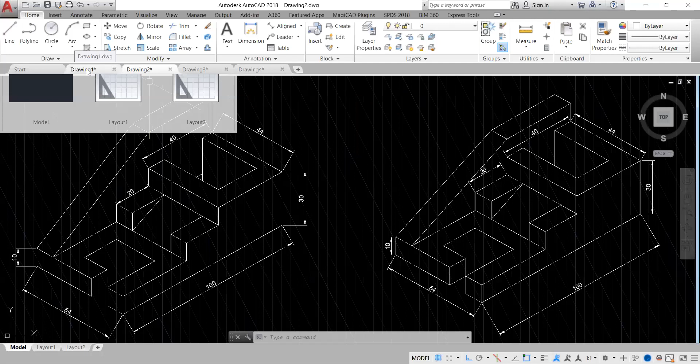Don't forget, in the last session I shared how to achieve drawings like this in isometric drawing, using tools like snap style and isoplanes on top, left, and right. This object looks like 3D, but it's actually a 2D line that just appears 3D, that's why we call it isometric. It's hinged at an angle of 30 degrees to the plane, or 60 degrees, depending on the angle specified. But what I want to show now is how to combine your normal lines with circles.

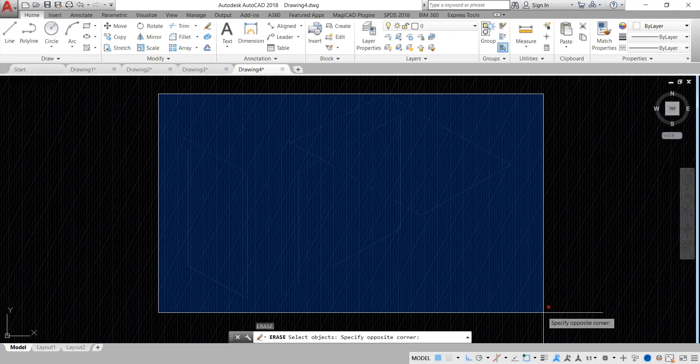I'm going to draw something that looks a bit deeper than this. The first thing I'm going to draw is still going to look like this box. But how do you start your drawing from the beginning? Let me share a new screen and wipe out all this.

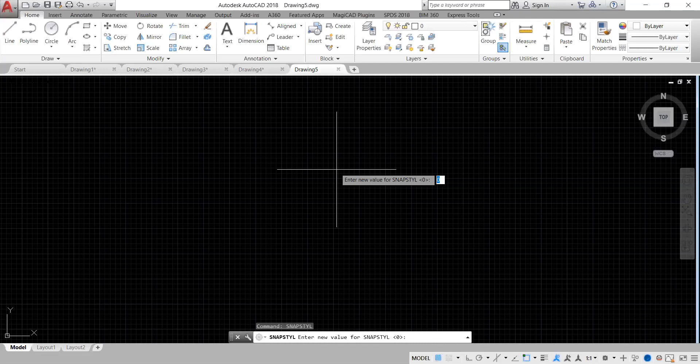Let's assume you have a screen like this with its X and Y axis this way, and the plane is flat. The first thing you do is type in snap style, that's when you're starting fresh. You punch enter, type 1, and you're going to have that plane flip.

I want to draw a box like the one you saw the other time. So I'm going to take polyline, click here, and turn on my ortho mode so it can allow me to draw 90 degrees. I already have isoplane activated on top, but I need the left first. So I pick polyline and draw 100.

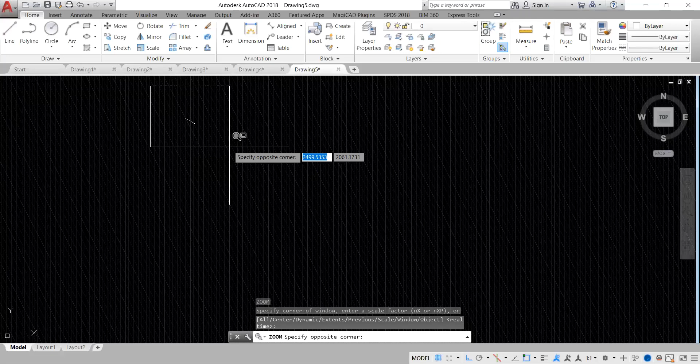I've drawn 100, so I need to zoom in well so I can see this object very well. I have a 100 line there, depending on the units you specify. I'll assume we are using 100.

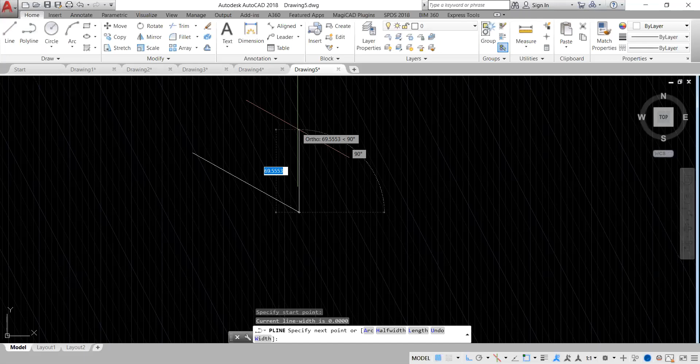The next thing I'm going to do is complete it. I want to make it a 100 by 80 line. So I'll pick this, draw, and go up by 80. Then I'll go towards that place by 100 again, then close up that box. Now let me bring it to your view.

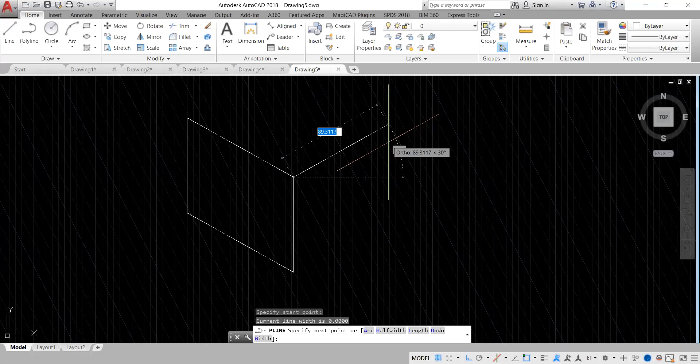Now I want to change my isoplane to right, so I can take this and draw again. This time around, maybe I need 80, then go down by another 80, then close up that. Now I need another polyline towards this part.

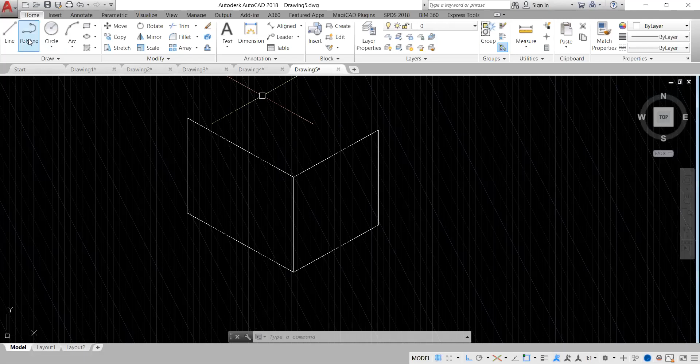To go that place, I need to change my isoplane this time to top. So I'm going to have my polyline draw 100mm and close this place up. Now this looks like an exact box in 3D, but this is isometric.

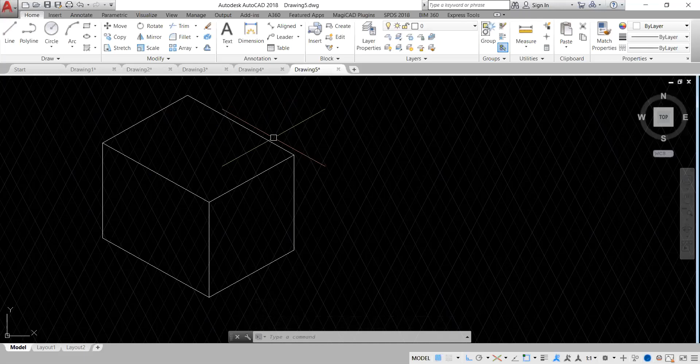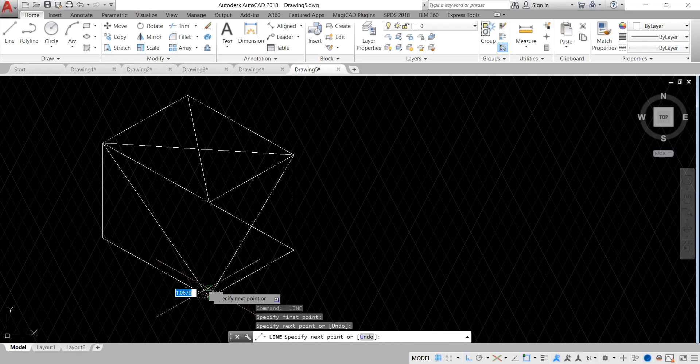Now we want to put a circle in the middle. The first thing is to utilize your diagonal. Don't forget we had a drawing in one of our episodes on how to draw using diagonals. I just want to use the diagonals as a center line for my circle, because I need diagonals to be able to draw that.

Now, how do you draw a circle? Don't pick circle directly to draw on isoplanes, it's on isometric, it will not work. How are we going to draw circle? This plane is already on top view, you can see the flat, how my cursor looks, it's on the top view.

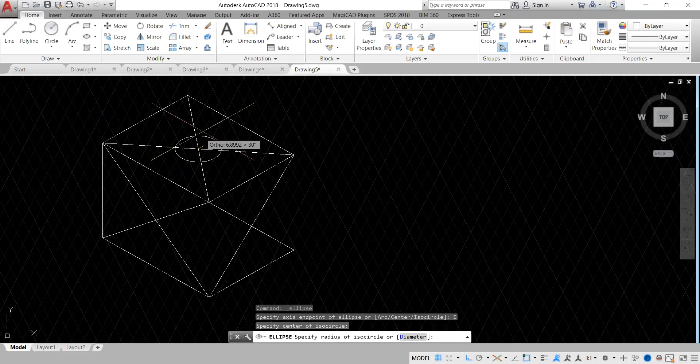I want to place the circle here, so you go to ellipse, pick any ellipse you like, but I want to pick the axis and end. When you pick ellipse, don't draw anything yet, come to the command prompt. There is Isocircle, type in Isocircle or select it. So I can click Isocircle, then come to the middle as the center, then specify the radius you want. This time around I need a radius of 20.

Now I want to do the same for the top isoplane, so I'll change isoplane to right. I'll come to ellipse, select isoplane, isocircle, click the middle, and 20 again. I'm going to change my isoplane to left, pick my ellipse, select isocircle, click here, and draw 20.

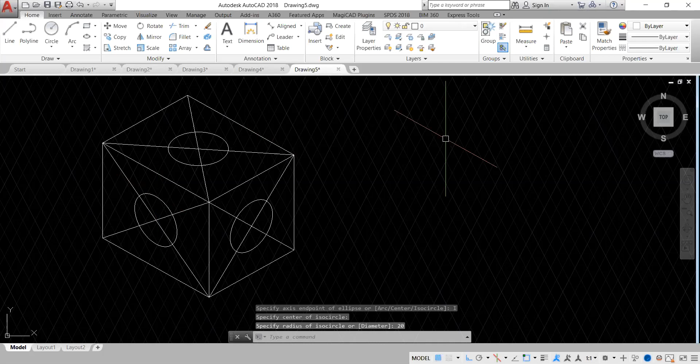Now once you are done, you can erase whatever is not needed. These are aiding lines, they are just meant to aid, to help you. Now you can see what I've drawn.

Now I want to show you that I can still do some stuff here. I have my circle, I pick a polyline, and go to the tangent of this and draw a line that goes long by 50. You can see a line that goes on by 50, or let me make the line longer than 50.

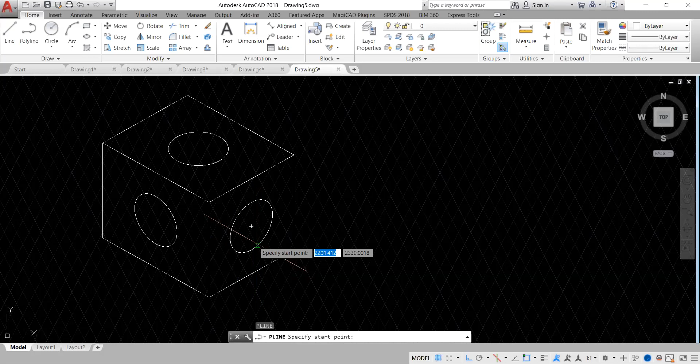I need you to watch what I'm doing. Polyline, where is my polyline? At the tangent, you can see the tangent. If you can't see the tangent, you can hold shift, right click, and select quadrant instead. So that's the quadrant, and I want to make it 100. Press enter, and I'm going to draw another 100 for that place.

Another 100, PL 100. This time around, I'm going to spot exactly where the quadrant is. So let's go on. Let's see, I want to make use of this part, the quadrant, and I'm going to punch another 100.

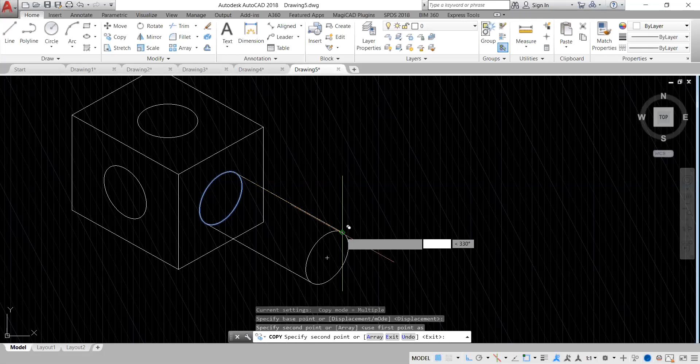Now I'm going to draw another circle here. This time around, instead of worrying myself, I can just copy the one I've already drawn, or pick any of the places and drop it here. So I'm going to pick my trim, right click on your trim, and clip this place off. I'll right click my trim again.

I want you to watch what will happen here, and you see what I've drawn. I'm not going to stop there because I still want to draw something very pretty, you are going to love this. So I'm going to make sure it's quadrant to quadrant. Then I'm going to pick another ellipse, and pick my isocircle.

Instead of me drawing up to 20, sorry, I'm going to change the plane, isoplane, to change to right. I'm going to pick my ellipse, pick my isocircle, come to the center, and this time around, I'm going to draw the radius to be 10. So I'm going to pick erase to erase whatever is not needed.

You can see these objects I've drawn, you will think it's 3D. I can do the same thing I have here for this place, for this place. Now watch what I'm going to do. I want to replicate the same thing I do here for this place and this place. So I want you to watch on. Don't blink your eye wherever you are.

All right, pick my polyline. This time around, I'm going to look for the quadrant. But make sure you change your iso plane because that plane you are going is left. So I'm going to pick my iso plane, look for the tangent. This is the tangent, now pick, you have your tangent. Now you can see it's not allowing me to draw to the place towards where I need.

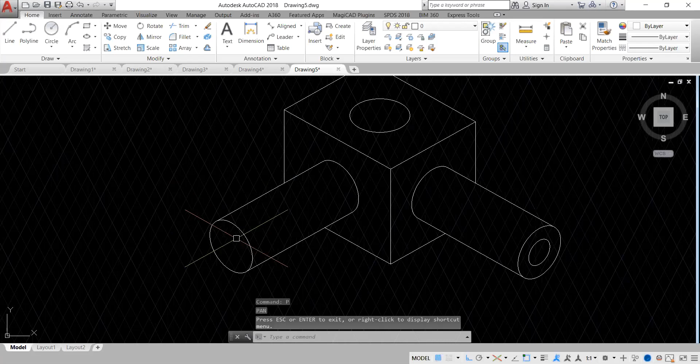Now see what I'm going to do. Trim, enter, right click, delete this, so that nobody will think it's 2D. Can you see that I've achieved that? I'm not done because I'm supposed to put the smaller ellipse too there.

Now, to make it tubular, what am I going to do? I'm going to ensure that I change the ISO plane back to where? ISO plane, you need to know where you are moving to. I need to change the ISO plane back to left. ISO plane, now back to left or right, left.

Good, pick your line. You might even draw the circle directly because once you select the isocircle and the ellipse, you can just draw it directly. The center line will be there waiting for you. You can see that, so I've drawn this.

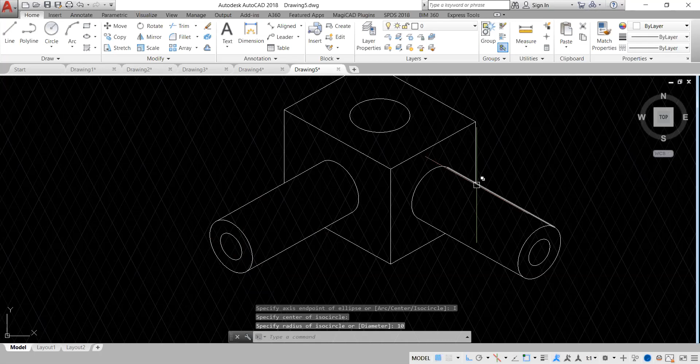So the next thing I want to do is achieve the same thing for the top. This time around, you know that if you want to draw here, you have to change your ISO plane. Okay, I think I still have my ISO plane intact. So I click here, I will say that ISO plane go up by 100. Now, I want you to hear me out.

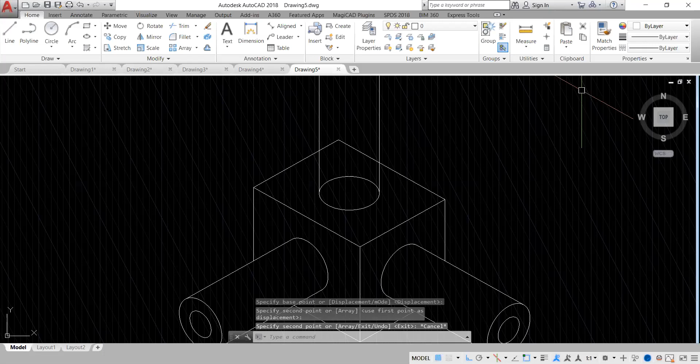When I want to copy this, see, I'll pick the base here and look for where you can find the quadrant, not where you find a tangent. Are you there? So once you are done with that, see what I'm going to do. I'm going to copy the base ellipse and bring it up here.

Now I'm going to my ellipse, click isocircle. Don't forget isocircle, now look for it. Now it's not drawing well because I did not change the ISO plane. So ISO plane, change it back to top. Select my ellipse, select isocircle, then look for it and draw 10.

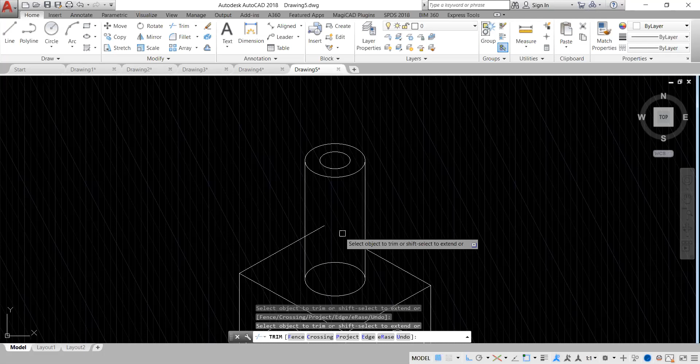And you just pick your trim, see how I'm going to do the trimming. Right click, trim this place off because it's not supposed to be transparent, and boom, I'm done. So let me zoom it back so you can see what I've drawn. So that is how to draw using isocircle, polyline, your isoplane, and the rest, how to combine them.